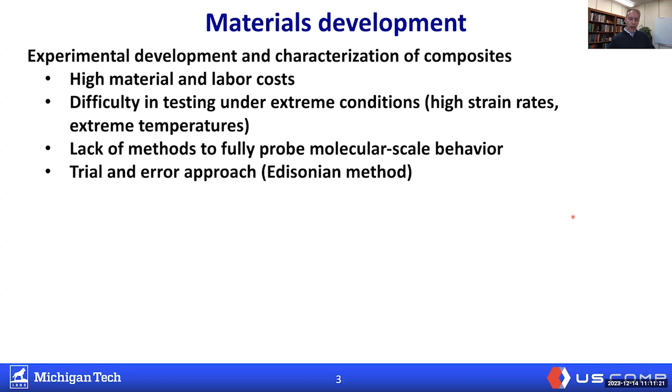And also on the experimental approach, it brings us down to more of a trial and error approach to do this, sort of an iterative method. We call this the Edisonian method. And you probably all know his famous quote, "I have not failed, I've just found 10,000 ways that won't work."

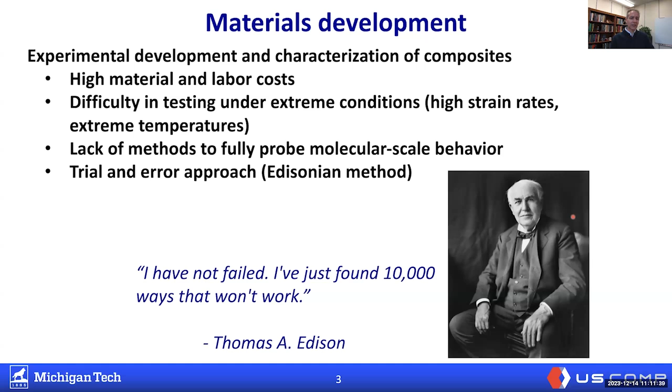All right, so maybe in the 20th century, it was okay to try 10,000 ways when we're developing composite materials, but it'd be really nice if we could do something a little bit different. Now, fortunately for us, as we get into the 21st century, we've got really powerful computational modeling capability. Computational modeling changes the whole approach to developing new materials.

So, for example, I put some examples on this slide here. There's maybe a few of us in the audience that remember the computer in the lower left right there. I was learning how to use that in elementary school. And at the time, of course, that was the coolest thing. It was very powerful, right?

But now we laugh at that, thinking about what we see in the lower right, where just last year, Frontier came online, fastest supercomputer in the world, 2 quintillion calculations per second. So you can see in about 40 years, we have come a really long way in computational power. But how does that help us? Well, computational modeling can really help us accelerate material development.

First of all, it can provide a really efficient means to explore design space. If we could parametrically adjust material design parameters, do it very quickly, use structure property relationships, we can very quickly understand what kind of material or processing parameters need to be adjusted in order to yield the optimal properties that we're looking for.

Also, computationally, we can predict material behavior under a very wide range of conditions. As I said earlier, when you have really high temperatures or really low temperatures or really high strain rates, experimentally, it takes a lot of effort to set up those experiments. Well, people like me who do computational simulation don't have to do that. I just change a number. I just change the temperature. I change the strain rate. That's all I have to do. No special equipment. So computationally, it really allows for those types of extreme behaviors.

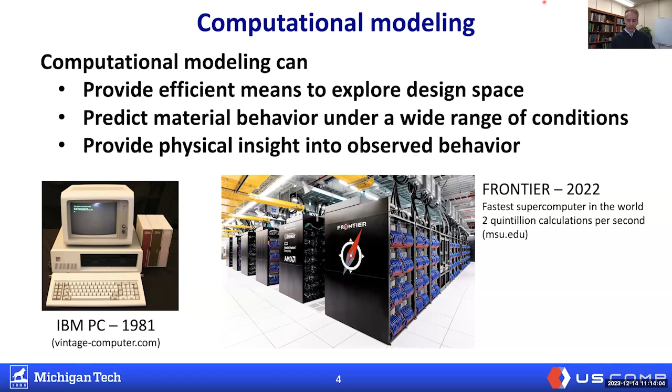All right, now, before I get into the meat of this, there's another thing I want to talk about, and that's the Materials Genome Initiative, MGI. This came out in the Barack Obama administration back in 2011. The idea behind this was that, much like the Genome Initiative in the earlier part of this century, we needed to figure out a way to cooperate worldwide in order to develop materials to meet the actual needs that we have.

Sometimes just us working alone in our silos, either at our individual offices or our universities, or even just in a silo in our own country, we really can't take advantage of all the resources around the world, all the expertise that we need.

And so the Materials Genome Initiative is the thought that we could really work together, develop brand new computational tools, brand new experimental tools, and have them open to the public, generate a tremendous amount of data, and put that in a database or multiple databases. So having all this digital data together with these new tools can really accelerate material development.

Now, the funny thing is, when this first came out, things like machine learning and artificial intelligence weren't really much in our vocabulary. So this was a perfect segue into this modern era where we really utilize machine learning and we need tremendous amounts of data. So the idea behind MGI is we can put all this together. We can solve all the world's problems you see on the outer periphery of the circle here: clean energy, national security, human welfare, and developing the next generation workforce.

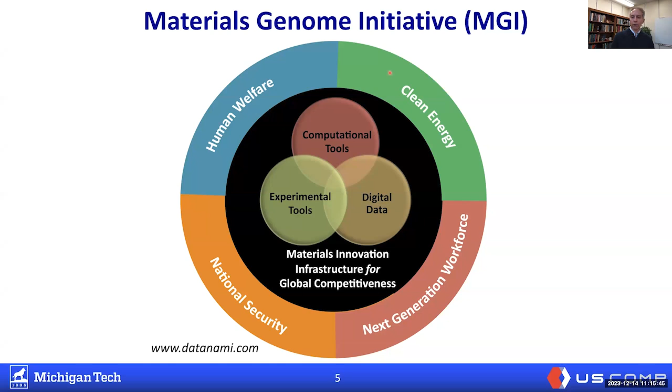Now, putting this all together, NASA realized they had a problem when it comes to being able to afford fuel on these deep space missions, particularly the ones that have people on them. And so they came out, this was probably in about 2016, with a solicitation for what I'll explain here in a minute, Space Technology Research Institutes. They realized that in order to meet the goals, they had to quantify the requirements. And that's what you see here on the screen.

First of all, if we want to be able to enable composites or any material for that matter for deep space missions, we needed to be able to have a quasi-isotropic specific tensile strength that's basically triple of what we had before, 3 GPa per gram per cc. I know that number probably doesn't mean a whole lot because it's odd units, but basically that's strength per unit mass density, right? And these are essentially threefold increases over state-of-the-art composites. Also, a specific tensile modulus of 150 gigapascals per gram per cc.

In addition to those tensile properties, they also recognized that having a 50% increase in fracture toughness, specifically interlaminar fracture toughness, would also help enable a new generation of composite materials for deep space missions. All right, the other thing is, of course, a lot of us can develop these types of materials in our laboratory. We can maybe make small samples of them, samples we can hold in our hand. We can publish really nice papers on them, but we can't necessarily build a rocket out of something we can just make in handful quantities.

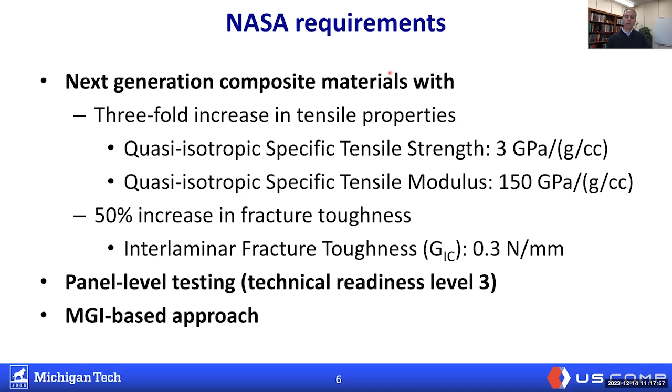So NASA also specified we need to be able to scale it up to panel level testing. So this basically brings it to the technical readiness level, or TRL level 3. All right, which goes beyond basic research, but starts to push it into more applied research. And also NASA realized that things like this sometimes are hard to do alone. If we used an MGI-based approach and we work together as a big team, utilizing all of our tools and our ability to share data, then we could rapidly accelerate how we develop this material.

So this solicitation came out in 2016. It was for what's called Space Technology Research Institutes by the Space Technology Mission Directorate of NASA. So we applied as a team and we were awarded one of the 2 first-generation NASA STRIs. So the total funding of this has been about $17 million over 7 years. This started in June of 2017. So if you're doing your math, you realize we're coming to an end right here. So it's kind of nice. I can kind of talk about this towards the end of the project and really highlight some of the achievements that we have.

Pictures there from our meetings. You can see we have a good group of people, a relatively large group of people. In fact, total, over the whole 7 years, we have a total of 12 universities involved. All right, and I'm going to show you a list of those 12 universities. We've got a few materials manufacturers, which have been really critical. Us university people, we like to think we can do it all ourselves, right? But at the end of the day, when it comes to developing materials, unless we have materials manufacturing involved, not only supplying the materials, but giving us feedback as to what it's going to take to actually commercialize and manufacture the material, we really can't make much progress. So we're really thankful to have some materials manufacturers involved.

Of course, NASA was involved not only from an administrative standpoint, but also technically. We've got some great technical folks at NASA who have been deeply involved. Air Force Research Laboratory has been a partner, and also several aerospace companies, which you'll see a list of here shortly.

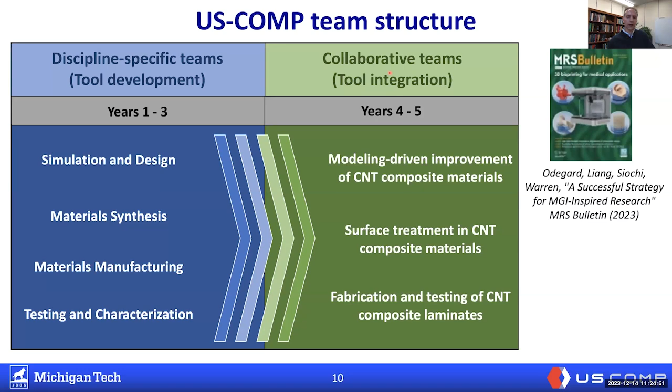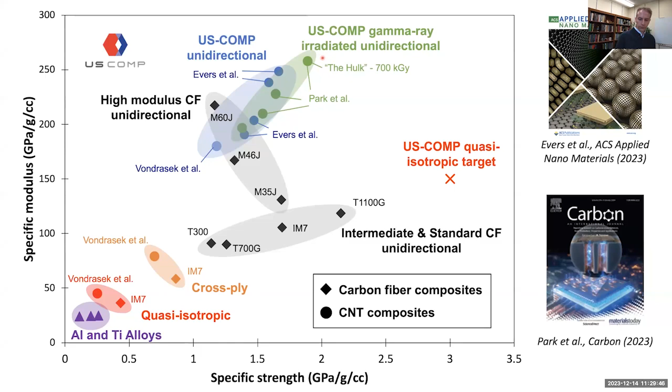All right, now what I'm going to do is go through 4 more detailed explanations of some of the projects we're working on. What I'm going to do first is talk about 2 of the experimental-based ones, so you get an idea of how we made this material.

Then I'm going to talk about 2 computational projects that helped inform these experimental projects to make this computationally driven materials research. I'll show how the computation provided clues and little pieces of information and understanding that were vital for us, not only to design these materials, but understand their behavior.

So let's talk a little bit about carbon nanotube yarns. I'm going to assume for a moment that most of this audience is familiar with carbon nanotubes. If not, I can briefly explain. They're small tubes of aromatic carbon that, if they're structurally perfect, provide the highest stiffness and strength unidirectionally that's known to man, essentially.

The trick, though, is that we've been working with carbon nanotubes pretty consistently as a research community for the past 2 decades. Really, for the first 15 years, not making a whole lot of progress because these carbon nanotubes tend to be so small, they're really hard to grab in a composite.

For composites people, you know that what makes composites work are the carbon fibers or the glass fibers. Essentially, we can transfer load between the matrix and the fiber and take advantage of those properties of the fiber. But carbon nanotubes are so small, sometimes it's hard to get that load transfer.

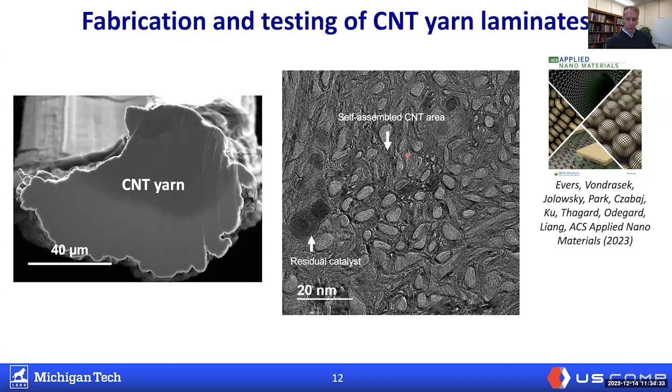And put together, this forms a carbon nanotube yarn, which has some pretty remarkable properties compared to carbon fiber, not only in terms of stiffness and strength, but one of the major advantages of this type of microstructure is the flexibility of the yarns. Whereas carbon fibers, if you bend them too much, they will snap. They're brittle enough to do that. These carbon nanotube yarns, they don't like to snap. When you bend them, they like to just bend. So we can make all kinds of really interesting woven patterns or preformed patterns using carbon nanotube yarns, which is a big advantage.

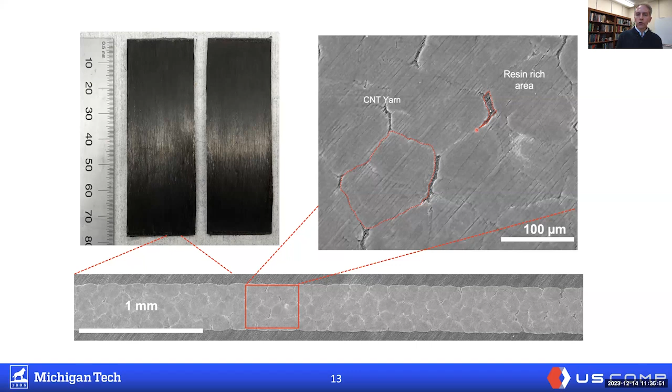And I told you earlier, they're not only flexible in terms of bending the yarns, but they're flexible as far as their cross section goes. And with carbon fibers, you're pretty much stuck and pack those so tightly. But with the carbon nanotube yarn, with its flexibility, you can pack it even tighter. You can even take up a lot of these little spaces. You can see the resin-rich areas are tremendously reduced when you're using a carbon nanotube type of morphology in these composites. So we still have resin in between them for the load transfer, but we get rid of the resin-rich regions, which means we can drive up the volume fraction and drive up the material properties, including stiffness, strength, and toughness.

So this material, and again, the citation was a couple slides ago. I encourage you to look at that paper if you want to see more details. But in that paper, we also outline the process of testing these laminates. This work was done at the University of Utah. You can see some of the images here. You can see that when they're tested, they do fail in tension. The yarns do break. It's not like they slipped out of the grips. They're very good at what they do there. They were able to get the failure to occur the right way. And you can see the failure mode.

And this graph is very similar to what I showed a few minutes ago, but this is specific to the results of this paper. And what you can see here is the standard deviation of the different laminates that were fabricated as part of this individual effort and where they stand on this property graph. By the way, each of these data points represents a different matrix resin. So I believe this top one was a benzoxazine. We've got a bismaleimide. We've got some cyanate esters in there. There's more details in the paper. But by being able to use these types of carbon nanotube yarns, different resins, we're able to show very nicely that this type of composite works really well for dramatically increasing the modulus over state-of-the-art composites.

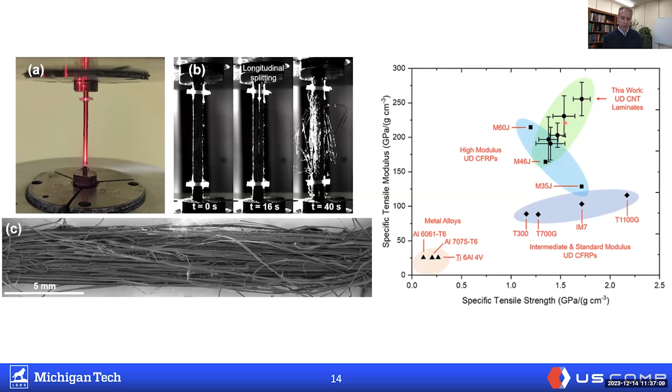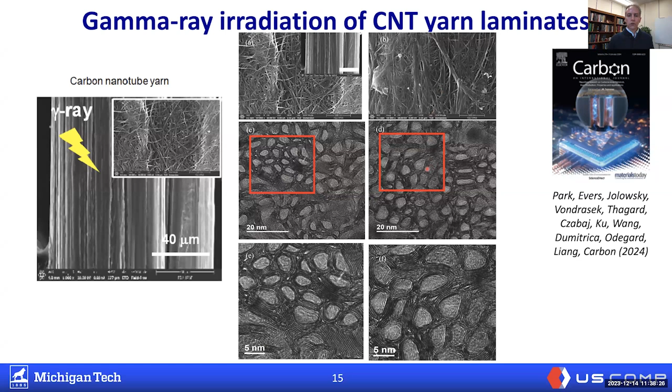Now, the nice thing about our institute is we can go in the lab and we can get these results. And we could just publish a paper on this just as it is. But it's also really nice to be able to look at the details, try and get a physical understanding of what's going on. And so with our molecular modeling folks in the institute, and I'll show you some more examples of this, we're able to go in and take a look at what's actually going on, maybe come up with some models to try and replicate what we're seeing, just so we can understand what's happening.

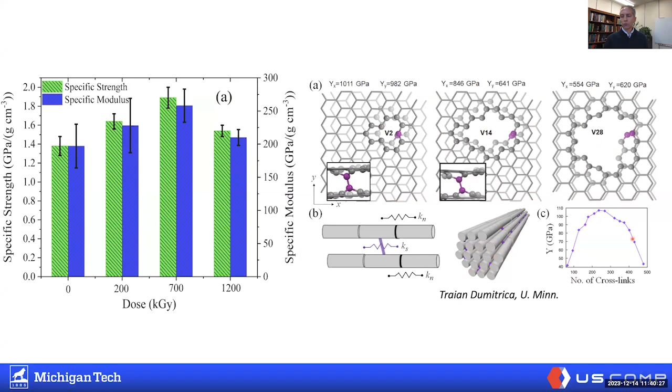Also, we could take a look at how these crosslinks you see in purple affect a carbon nanotube bundle. So it's not just what happens between two parallel sheets, but what happens with the bundle in the lower. In computational simulation, looking at modulus, we can show that there is indeed a sweet spot where if you create the right number of crosslinks, you can maximize the modulus. If you make too many crosslinks, you start to degrade the material.

All right, now two more things I want to go over. These are more modeling-based projects that help augment some of the things you've already seen. Now, one thing I want to make really clear before I talk about this is that within the Institute, there are all kinds of projects. We have lots of publications, lots of individual things that we looked at, lots of great works by a lot of great people. Of course, there's no way I could go through all of that in this presentation today. So I only had to pick one little thread of projects that kind of go well together in order to present.

And so this paper that was first authored by Prashik Gaikwad, this is essentially molecular dynamics modeling, trying to understand what's physically happening when we have amorphous carbon, we have the carbon nanotubes, and we're shooting it with gamma rays. So whereas on the previous graph I showed you, that was more individual nanotubes, nanotube bundles. This was focused on what happens at the interface of amorphous carbon and nanotubes, because there's a lot of amorphous carbon in these carbon nanotube yarns.

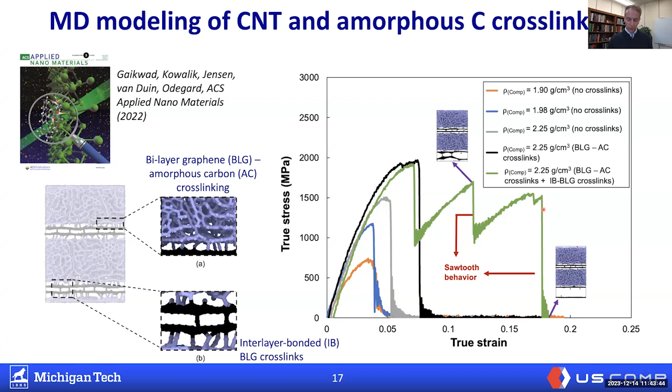Now, the final thing I'm going to go over here is another modeling paper that goes along with this out of Traian Dumitrica's group at the University of Minnesota. And that is the idea we can use computational simulation to look at the packing of carbon nanotubes and how that affects the carbon nanotube yarn behavior.

You can imagine this type of information would be really useful to a company like Nanocomp, who can control all the manufacturing parameters of these yarns. And so with information like this, they can get an idea of how to adjust their parameters in order to yield the best carbon nanotube yarn material that they can.

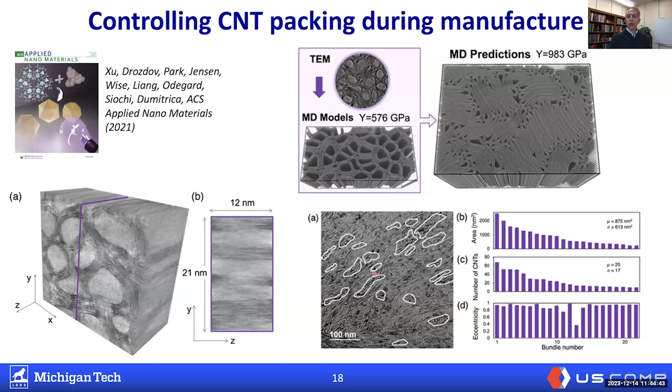So by using some basic TEM CT imaging, some really interesting analyses where we can go in, we can isolate where the carbon nanotubes are. We can take a look at their diameter, their eccentricity, how they're modeled. We can actually do a really good job of understanding what the topology is. Once we have an understanding of the topology, we can build models and we can run them.

So these are molecular scale models where we start with just a square packing. We start to go through a simulated processing of these yarns. We let the carbon nanotubes do what they want to do based upon their molecular and atomic interactions. For example, a model like this would tell us that two carbon nanotubes beside each other, when they do flatten, they'll flatten very nicely in this array. However, if their diameters mismatch, then we don't get quite the type of efficient packing that we want.

And by controlling the diameter of the nanotubes, the distribution of diameters of the nanotubes, and the pressure involved in manufacturing, which Nanocomp can control, we can actually look at how these yarn geometries form, how the morphology of the carbon nanotubes forms, and how we can control that. And if we know this, we also know their predicted properties. And so this is a really good way that we can use computational modeling to help adjust processing parameters to help drive the material development.